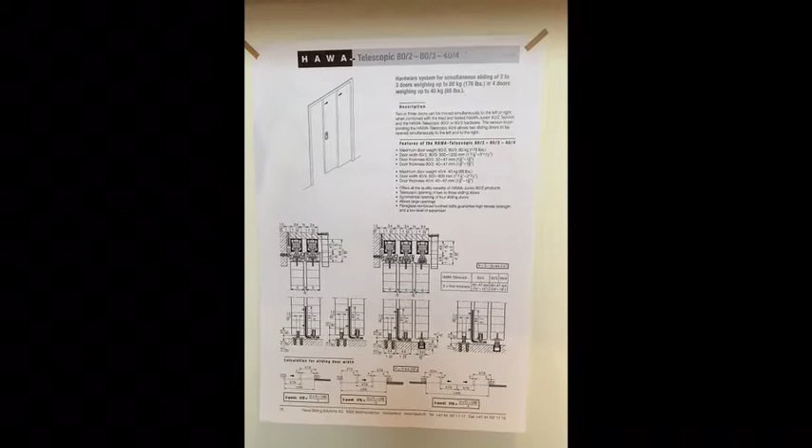So first of all, for a two-door telescopic, we advise you to either use our system planner or our catalog to calculate the size of the doors. We have two types of door, ST1 and ST3. ST1 is the door with the handle and the ST3 is the first door.

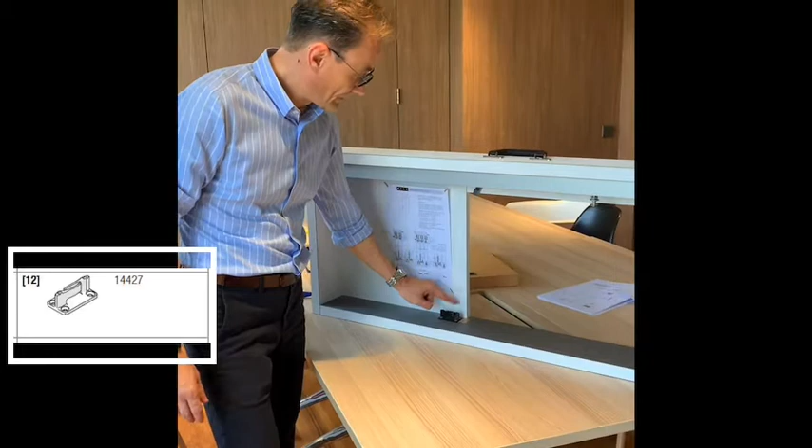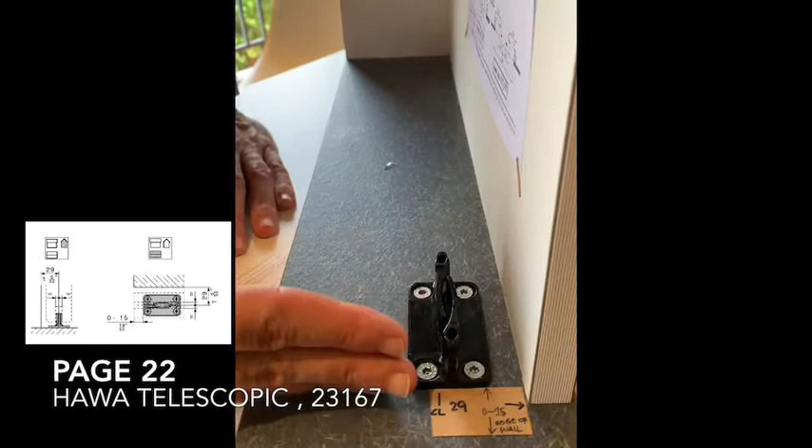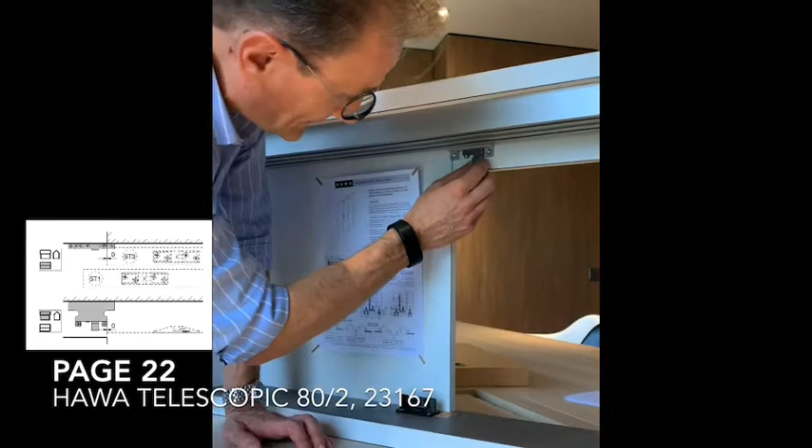Then we need to fix the floor guide. The center of the floor guide has to be at 29 millimeter from the wall, and it can be from 0 to 15 millimeter behind the wall. On top of it, we also have to install an important part for the telescopic. This is the fixing bracket for the tooth belt. This fixing bracket has to be fixed flush to the wall that covers the last door.

Okay, as you can see from our catalog or from the system planner, the suspension is fixed differently on the two doors. For ST1, the door with the handle, the suspension is fixed at 131 millimeter on the handle side and 170 millimeter from the back side. This allows us then to fix this other bracket that connects the two doors by putting it flush with the suspension system.

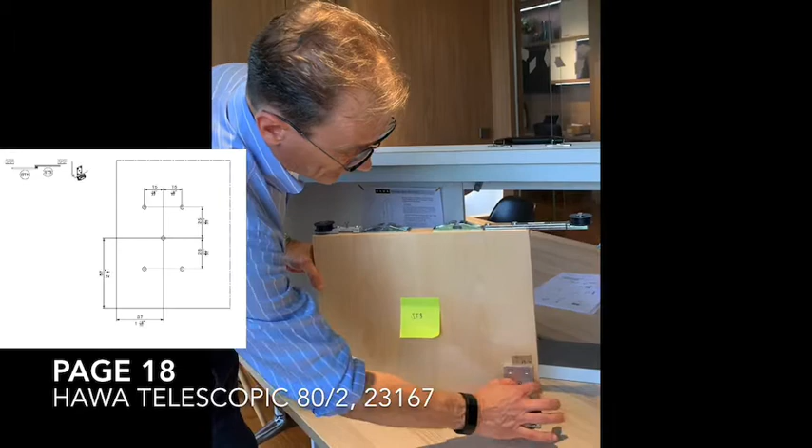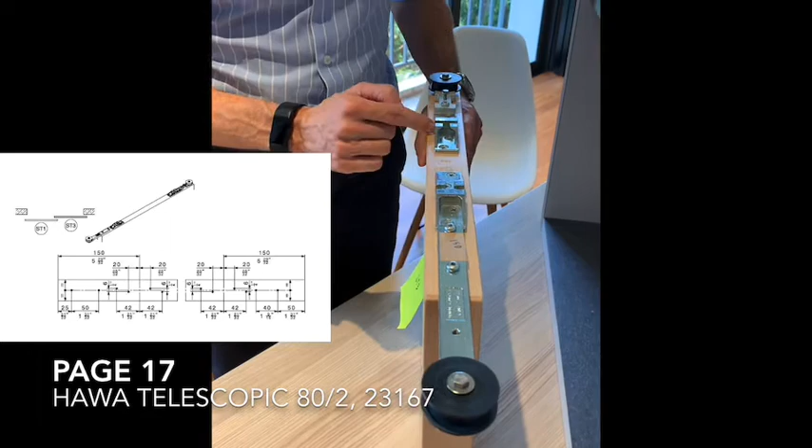The second door, ST3, has also the guiding bracket for the floor. The center of the guiding bracket has to be 37 millimeter from the edge of the door, as you can see in our mounting instruction and from the system planner. Then, similar to ST1, we need to fix the suspension system. In this case, the center of both suspensions has to be at 150 millimeter from the edge of the door.

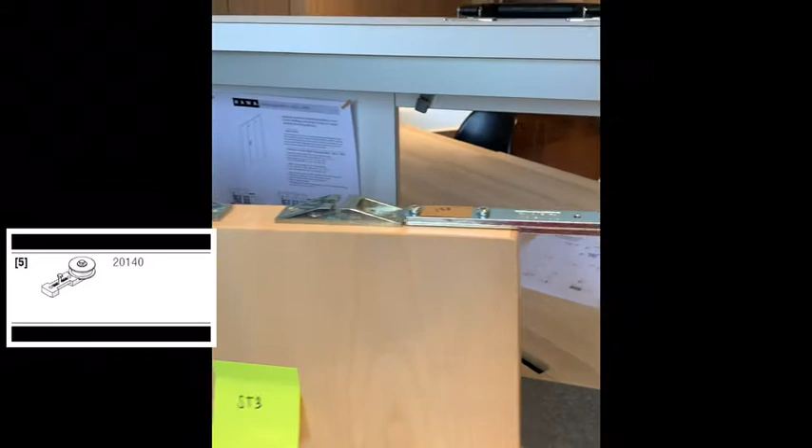Once we have installed the suspension, we can install the pulley in the front, which has to be flush, and the pulley on the back by putting it in contact with the suspension system. The core part of the telescopic door is the tooth belt. First of all, the length of the tooth belt, as you can see in our mounting instruction, is equal to 2 times the door width of ST3 plus 250 millimeter.

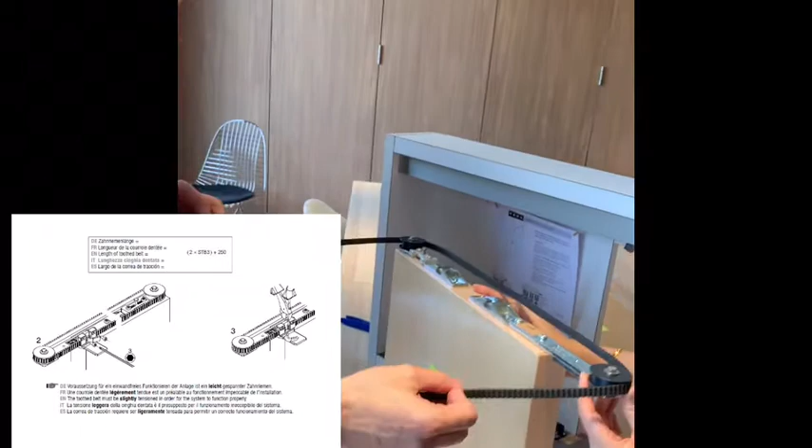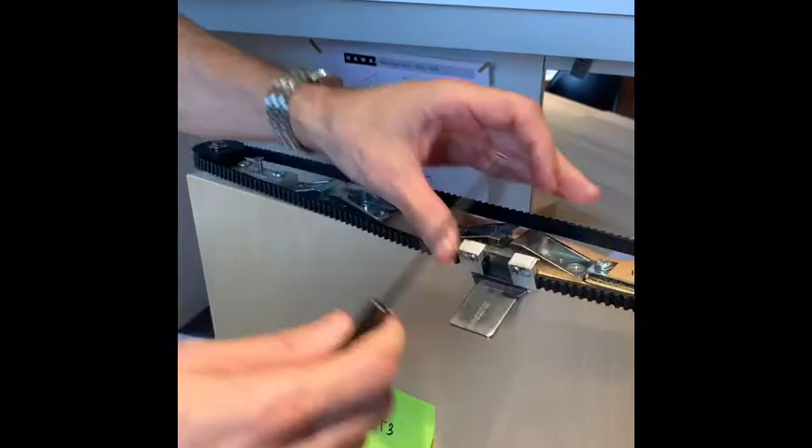We will cut the tooth belt and then put it around the two pulleys and join it with this jointing bracket. We have to tension it. We will fix it and then check the tension. This is a bit loose, we might want to tension it more. We have installed and tensioned properly the tooth belt. We are ready to go to install the doors.

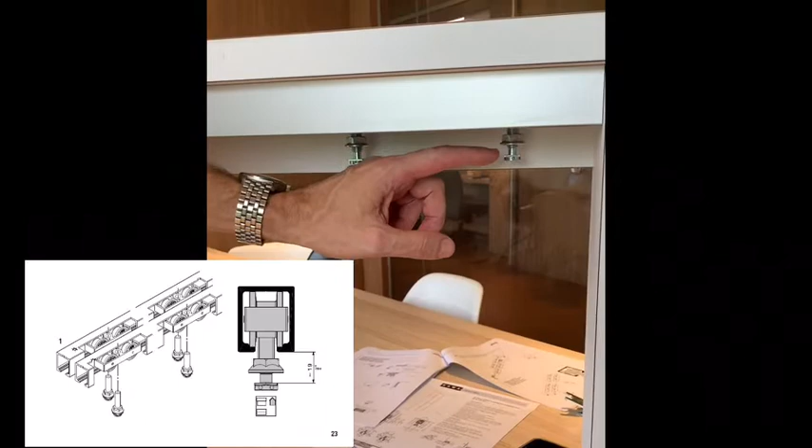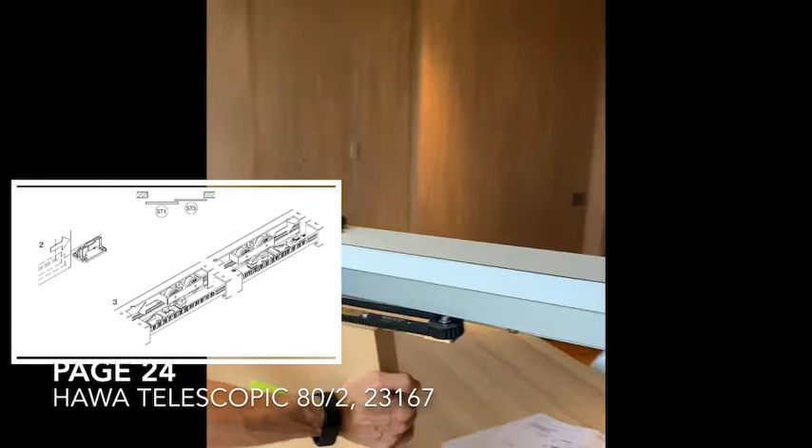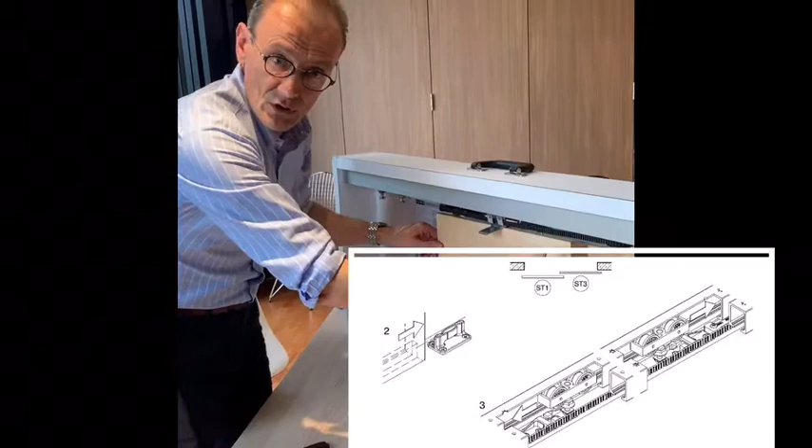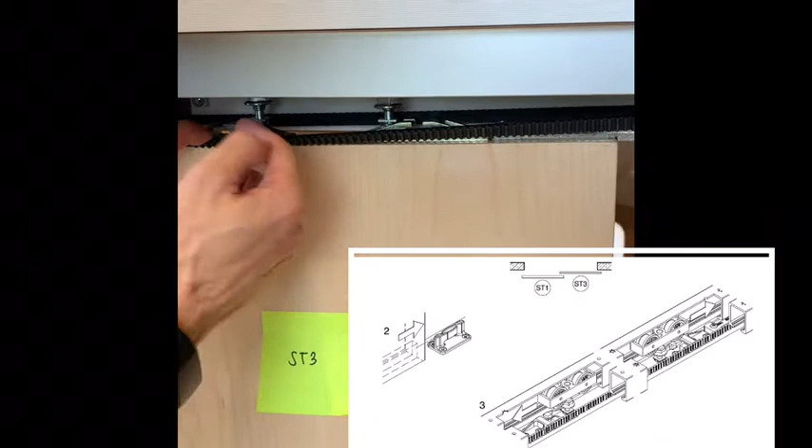The doors are installed exactly like any other Junior 80/Z system. We start with the door ST3. Important is first of all to check that the plate of the suspension is at 19 millimeter from the track. This distance has to be 19 millimeter during the installation process. Okay. Just put this one. Once we install the door, we move this bracket on the side so we have enough space to work. And this being a Z type of suspension, we can insert the suspension into the bracket from the center.

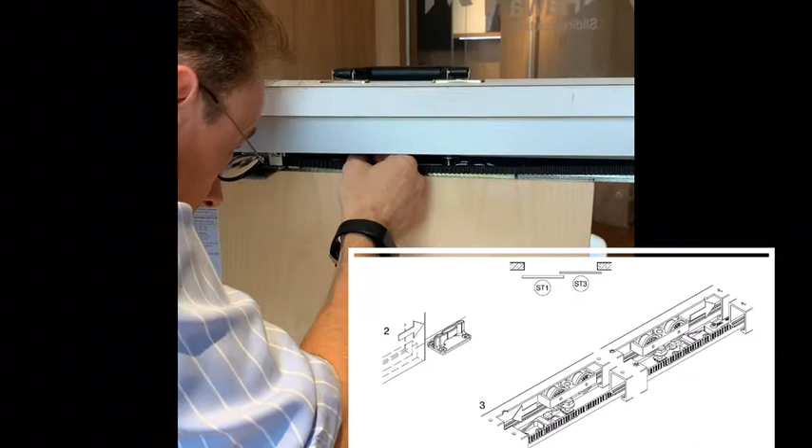Once the door is installed, we need to check that it moves smoothly, and that it is also right angle and aligned. Once this is checked, we can tighten the screw and fix the door.

I think you can close it. Now this one, if I check here, it's quite okay. I think here it's smaller, so it has to go a bit more inside. Like this. And like this. How's that? Yep. I think this should go a little bit more. Okay, move. Okay.

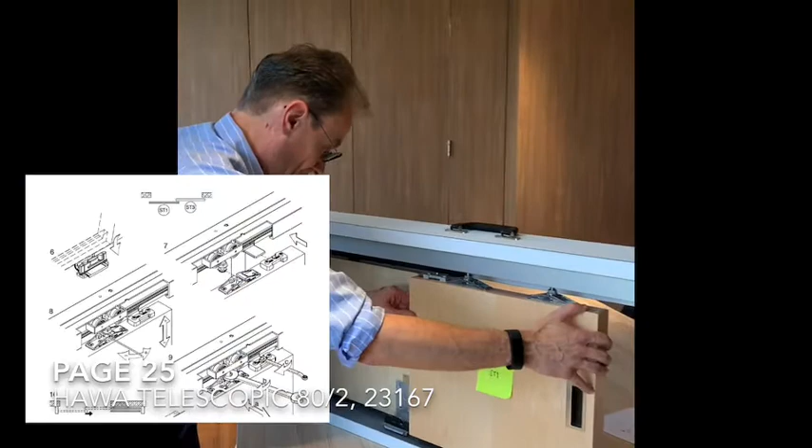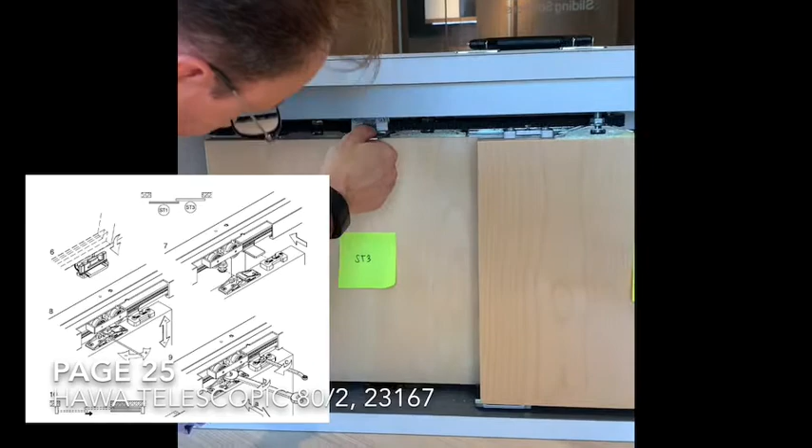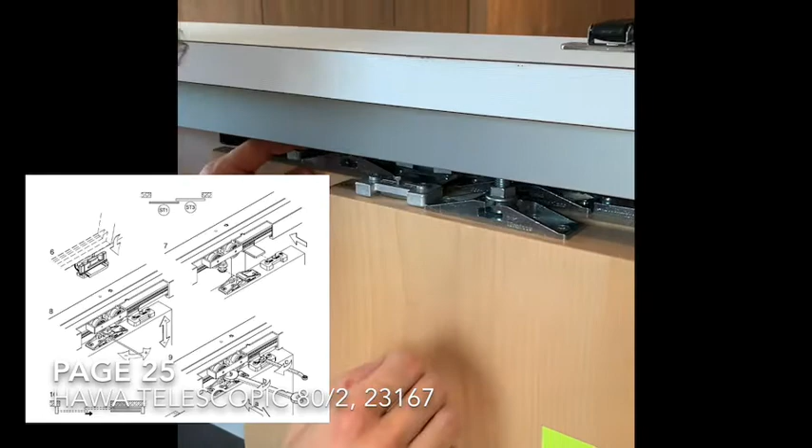Now at this stage we have to fix that thing, right? Once the second door is suspended, we insert it in the guide and we position the tongue in this part where I can move it back, and it's easier to connect the two doors together. Then I can connect the two doors, one into each other, and tighten the screw. I can check that the movement is correct. And then tighten the screw properly.

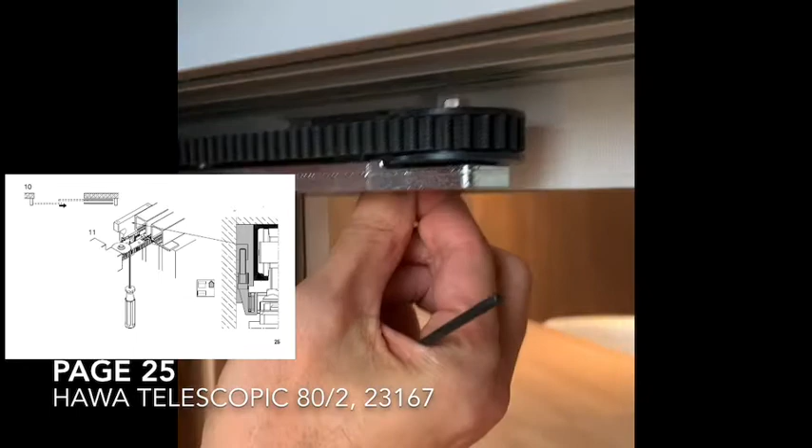And then the last step of the installation is to fix the tooth belt to the wall in the fixing bracket by putting the tooth belt inside the bracket, as you can see there, and then tighten the screw and pull this up and fix it, like we are doing now.

Okay, the last check, we see that the doors are parallel. The distance is 14 millimeters, as it should be. They have the same height, and they are moving freely and smoothly and not touching the floor. They make no sound. Very good installation.